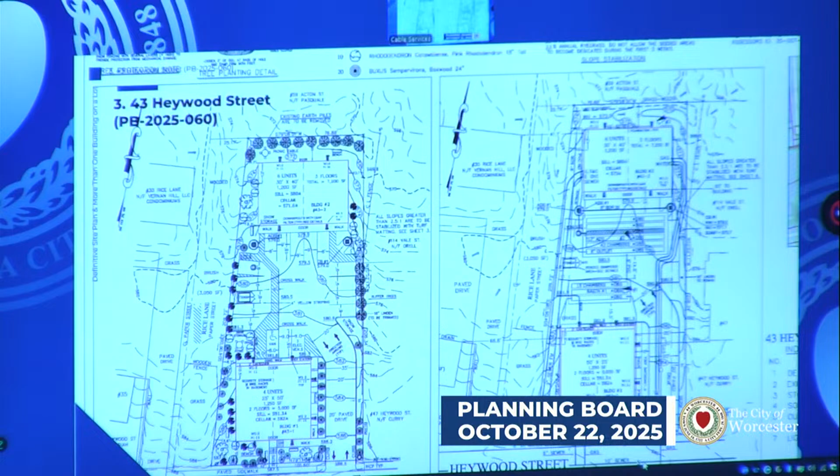We have frontage with adequate utilities on Heywood Street. All of the required utilities will be coming from Heywood Street. There is a paper street to the left, which we do not propose at this time to do any work in. However, at a future date, we anticipate acquiring that street because of the 50% ownership. The other half of the street has been claimed by the abutters on that side.

We're here tonight for a definitive site plan approval, review and approval hopefully, and a second special permit to have 2 buildings on 1 lot. We're proposing 10 units, apartment units, on the site, and it worked out best to develop 4 units in the front and 6 units in the back.

We could have done a single building. It would have been considerably taller. We felt, following the general appearance of the surrounding neighborhood, it would be better to keep the buildings lower and ask for a special permit so that we could do 2 buildings and end up with the same number of units, 10.

As I mentioned, the lot currently is, the majority of it landscaped, trees, brush, things like that. We are proposing to have 1 building in the front, 4 units, building in the back, 6 units, and all of the parking and drainage utility facilities will be in the center. It works out pretty well that way because all of the parking spaces are readily accessible to the 2 buildings from the center. It also has all the parking and other issues that go with it, dumpsters, things like that.

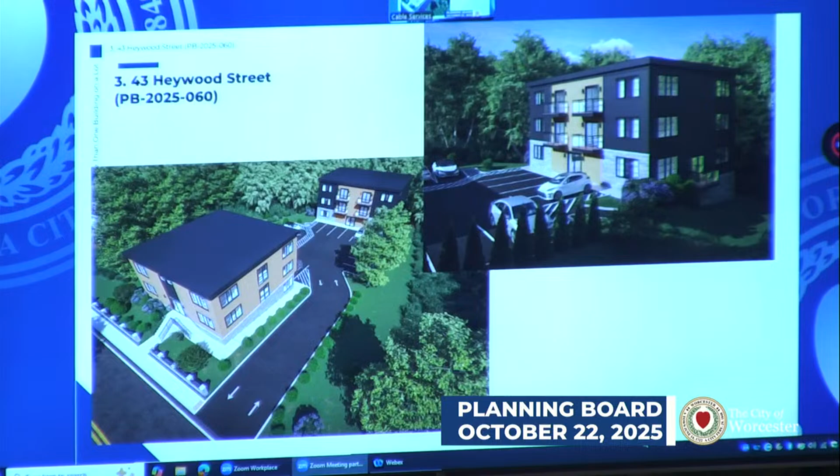They've provided a striped path through the parking facility that leads from the back of Building 1 to Building 2, which is great. We love to see the dedicated pedestrian infrastructure. We just asked the applicant if they'd considered an alternate treatment, like stamped concrete or pavers, to further designate this, since they're not able to separate it from the parking facility.

We had also asked, and it's highlighted in our memo, though it's tough to see here, around the northwest and northeast corners of the parking lot there's 2 catch basins, and some striped areas around the landscaping. We were hoping it may be feasible to regrade that area so the catch basins will still work as designed, but we can add some of that landscaping back in.

And speaking of landscaping, we have some other comments regarding that too. With the layout of the site, 2 buildings, it's not a layout we see particularly frequently, and it renders a lot of the site impervious. They are proposing some on-site infiltration, with 2 subsurface units, and they've provided quite a bit of information regarding how they intend to handle, manage, and operate it in the future. But we're just hoping there would be some opportunity to gain some of that landscaping back, given how much of the site is going to be impervious.

Some additional questions to the applicant: they have some amenity space in the first building, we asked if and how it's going to be programmed, and whether it's going to be available for residents in both buildings. There's an interior bike storage room, I think 12 bicycle spaces, and then like an empty room, which we were curious how it was going to be programmed. We also asked that there be some exterior bike parking for residents in the back if they don't have access to the interior secured bike storage, and for use by guests.

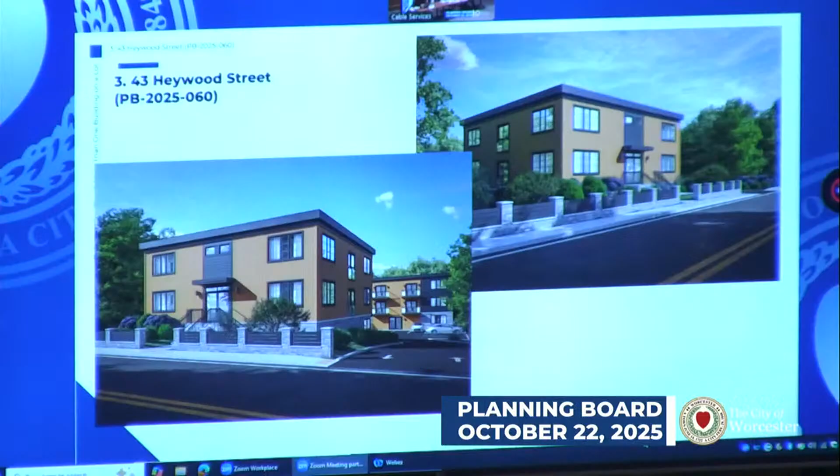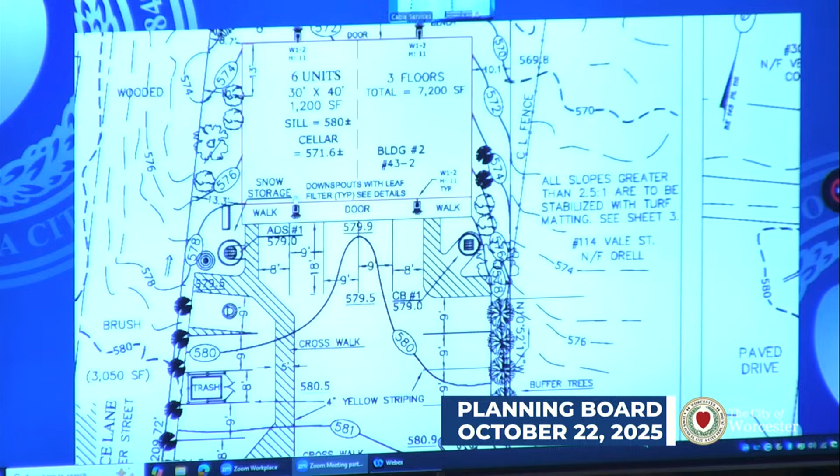The question was the staff suggestion to extend the landscaping area adjacent to the two catch basins on the northwest and east side of the parking lot. We did review that. Initially, we thought that having the area striped pavement would be beneficial to people who might need a little more space to get out of their car. But they could step out on the grass just as easily as pavement. So we are proposing to plant a low-growing dense grass in that area. However, the actual area directly around the catch basin and the drainage channel that goes to it would be paved. So you'd have like a 4-foot paved area just to keep dirt from being eroded into the catch basin, but the rest of it would be landscaped.

If I might also add, when you're talking about drainage and landscaping, we acknowledge that there is a problem with water getting onto the property of the fellow who just spoke, but it's not coming from our property. It's coming from the property above us. It passes through the rear of this property, a low spot, and continues on to his yard. There's no question, we have addressed that with the stormwater management design so that in the designed storms we have, 10, 25, 50 year, 100 year, we've actually reduced the drainage runoff onto his property by volume and by the Q factor, or velocity.

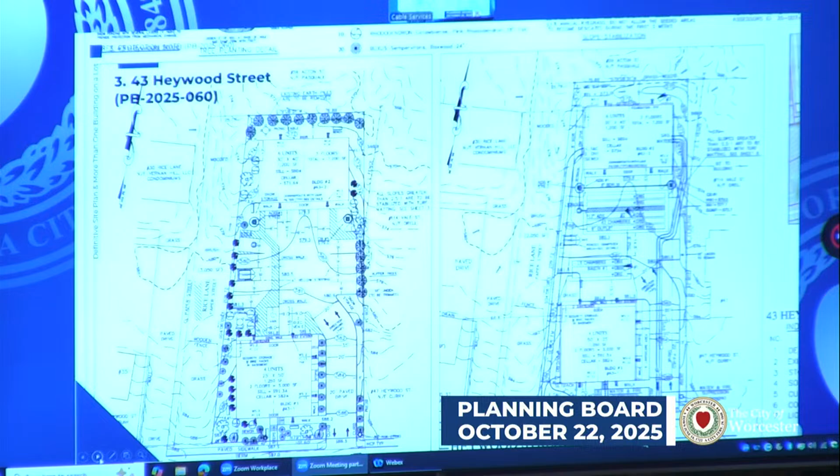Okay, I have a couple questions for myself. So I heard Mr. McCormick, and I think Ms. Russell, we'd be looking for staff to recommend a condition on just narrowing the landscaped areas we were discussing related to the catch basin, understanding that there would still need to be a path for the water. My second question is, there are 4 compact spaces and 2 EV spaces that are proposed. Wondering, for the EV spaces, is the applicant willing to put one charger online at occupancy?

You mentioned the number of compact spaces. How many did you say there were? Because there's quite a few. Staff believes there's 4, and then 12. We met the requirement for that. We think the larger spaces would provide plenty of space as well.

Related to the EV charging spaces, the question was would the applicant be willing to put one charger online at occupancy? This is Wolf Gentile, the applicant. I'm the current owner of 43 Heywood.

As per the email we got today, they requested 10% to be online. We should be able to do that because we're going to have the EV ready anyway. It's just a matter of running the wire. That'd be great, and we recommend it, and appreciate your answer on that.

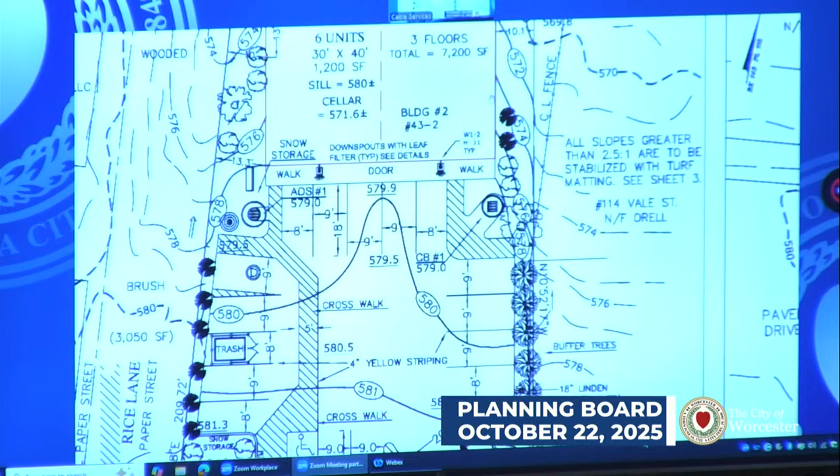Before I make the motion, is the applicant okay with that? Yes, absolutely. Okay, with that I would make a motion to approve—actually, I'd close the public hearing first. Second? Or is it a public hearing? No public hearing. Okay, take it back.

I'd make a motion to approve the definitive site plan and more than one building on a lot for 43 Heywood Street, subject to staff recommended conditions of approval on pages 2 through 5 of the staff memo, including the addition of a condition 1O with subsequent renumbering of the conditions. Condition 1O regards, as stated by staff, the landscape islands.

Second? On the motion: Mr. McCormick, yes. Mr. King, yes. Mr. Delera, yes. I vote yes as well. Motion passes 4-0. Good luck. Thank you, thank you very much.

Okay, next item we're going to hear tonight is item number 4, which will be 9 Ashland Street. This is a public meeting for a definitive site plan.

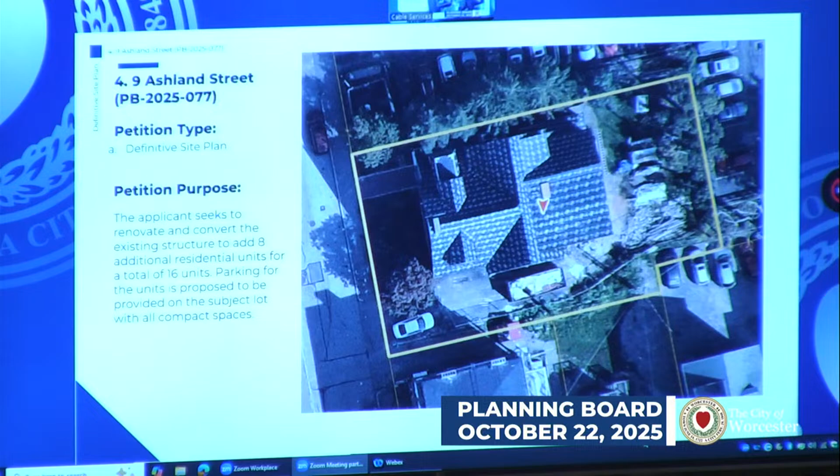My name's Gershom Gulko. I'm a lawyer here in Worcester, I've been a lawyer here for 46 years. To my left is Adam Gaval, the property manager and developer of this property at 9 Ashland Street. He's been before you before, and before other boards as well.

He has an ability, and in fact a history, of taking underutilized, sometimes dilapidated properties and turning them into the Taj Mahal. 9 Ashland Street, when he acquired it, was an abandoned drug house, and he has formulated plans to make it suitable, modern, efficient housing.

We've been before the zoning board and have prevailed, so to speak. I've asked him to bring with him some blow-up boards of a recent project he did on Blackstone Road that shows you the kind of work he does.

Frankly, in my experience, I've represented him and his father and his siblings in this type of business for at least 40 years. He puts his heart and soul into it, puts substantial money into it, and I don't want to waste your time and deliberate further, but he will address everything with regard to site plan approval.

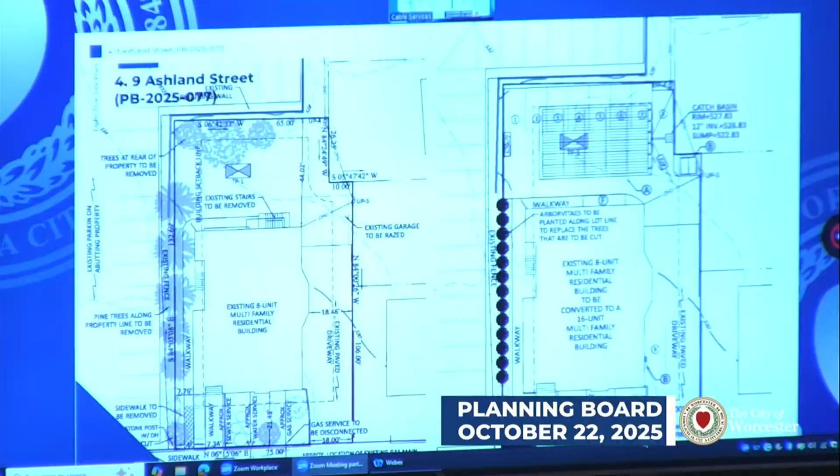I think for myself, I'm also satisfied with staff's review, and I appreciate the applicant's answers to some of the questions. The work looks great. I know a little bit about renovating some of the buildings in Worcester, and it seems like you do a great job, so happy to support.

Thank you for giving me this opportunity to better the city. I'm a Worcester boy, so I'm trying to make Worcester better. Yeah, there you go.

With that, I would make a motion to approve the definitive site plan for 9 Ashland Street, subject to staff recommended conditions of approval on pages 2 and 3 of the staff memo. Second? On the motion, Mr. McCormick? Yes. Mr. King? Yes. Mr. Delera? Yes. I vote yes as well. Motion passes 4-0. Good luck. Thank you.

Okay, next on our agenda, item number 5, 225 Shrewsbury Street. This will be a public meeting for a definitive site plan amendment.

Good evening, Mr. Chair, members of the board. For the record, my name is Joshua Lee Smith. I'm an attorney with Bowditch and Dewey, and I'm here, as you indicated Mr. Chair, because we're seeking a slight modification with respect to this project. This is a project that most of the members, not all, were present for.

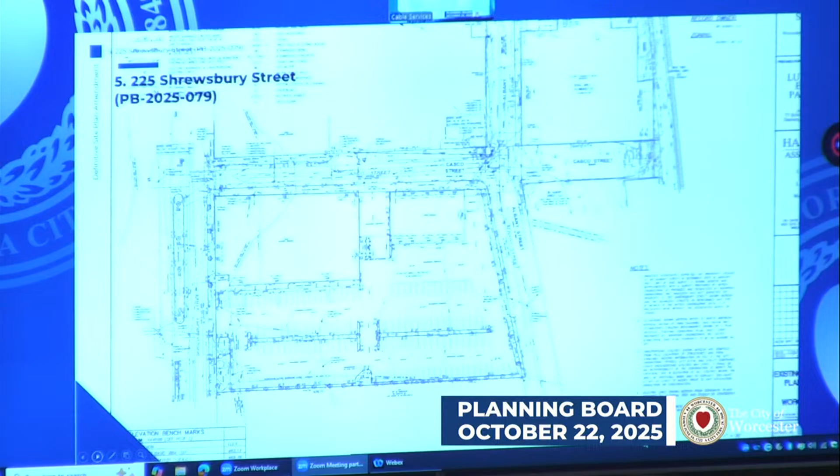So they're looking to relocate them to the end unit here, to the far right, as you can see.

So the one substantive item that we are looking to amend here is the removal of one of the conditions, which, to be honest, at the time we did have some discussions leading up to the meeting, and then ultimately there was a vote, and the condition, we kept saying no, we can't do it, and then the condition ended up staying in there for the vote. So it was a little bit of an oversight on our team, and after the vote occurred, our design team looked into it further, tried to see whether it was feasible or not, and it just didn't work.

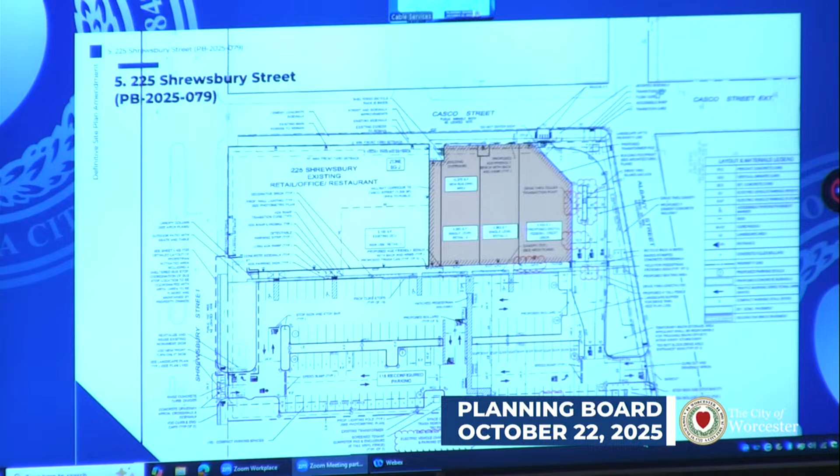No concerns for myself, it seems pretty straightforward. Mr. King? No concerns, thank you. Mr. Delera? Agreed, no concerns. Mr. Toomey? No comments, thank you. I also have no comments. This seems mostly administrative, so I think we're ready for a motion.

Make a motion to approve the definitive site plan amendment for 225 Shrewsbury Street, subject to staff recommended conditions on pages 2 and 3 of the staff memo. Second? On the motion, Mr. McCormick? Yes. Mr. King? Yes. Mr. Delera? Yes. I vote yes as well. Motion passes 4-0. Good luck. Thank you very much.

Moving on to the next item on our agenda, this will be item number 6: 76 1/2, 78, 80, and 82 Providence Street. This will be a public meeting for a definitive site plan and also a public meeting for more than one building on a lot.

Bear with me one moment, Mr. Chair. Sure thing.

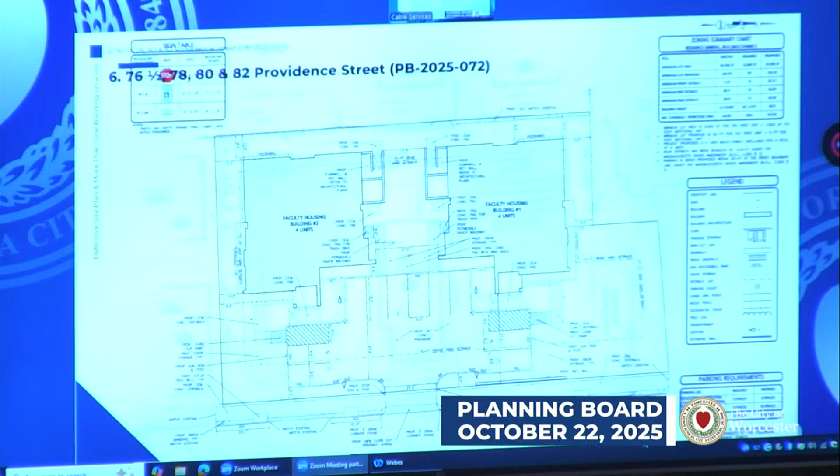And so here I'm going to hand it over to Clay. As I mentioned, we're showing some of these buildings and structures that are on the Academy's historic campus. So there was a lot of thought that went into the design of these buildings and the location and siting of them that went into the ultimate product that you're looking at now.

Thank you. Clay? Yeah, sure. My name is Clay Smook. I'm with the firm Smook Architecture and Urban Design. I've been practicing architecture in the Commonwealth of Massachusetts since 1989.

Worked for several firms and started my own firm a little over 20 years ago. I moved my firm from downtown Boston to Westboro to bring a level of Class A architectural and urban design services to Metro West, and it's been a wonderful journey.

My firm, as I mentioned, does urban design. We really look at projects and what their impact is to the city and the street as much as it is about architecture as sort of a jewel and an icon.

We started this project earlier in the year, late last year, really looking at the existing buildings on the site, as well as the triple deckers lining around the building. I think some of what we gleaned from the site was that the buildings tend to be in a Richardson Romanesque design quality, but also have certain Frank Lloyd Wright qualities. They generally have a central entry, and they tend to have hip roofs.

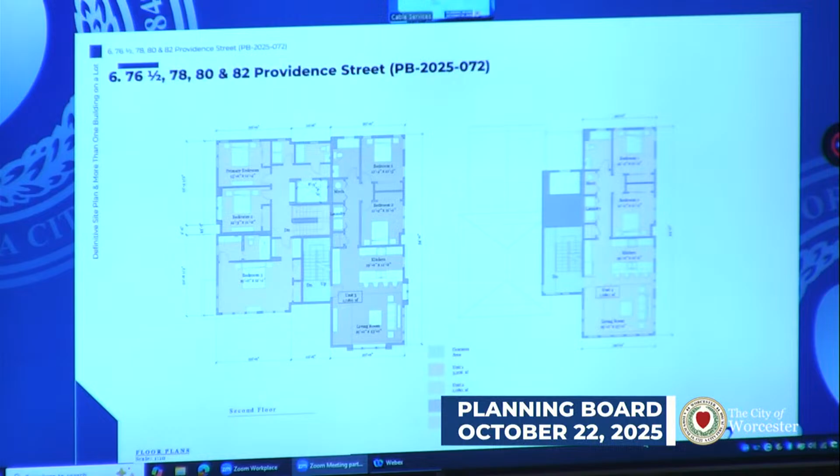On the next slide, we're back in the townhouse on the left, the yellow ochre color. You've taken the elevator or the stair up. All the rooms are accessible, all the baths are accessible, so it's a totally accessible unit. On the right side is the stacked flat, where a generous central stair tower takes you up to the unit above the other flat. These last two stacked units are not required to be accessible, although we're carrying the dimensions from the lower level nonetheless, because being disabled doesn't necessarily mean you're in a wheelchair. So stacked on the right is flat number 2, and all the way on the right, in that pale color, is number 3.

These are the elevation drawings of design development. They're not rendered, but they are labeled to talk about the level of materials we're building here. These are going to be built as legacy projects, not seen as disposable housing stock. We're using real materials, real brick that we'll be choosing to marry into the look of the existing building, lots of architectural detail, cornices. The windows will be a Pella window, not vinyl, an aluminum-clad window with real wood on the inside. Obviously all this meets the current energy code.

The building is also clad in Boral, which is a fly ash product, similar to Hardie product, but a little bit better. It doesn't absorb moisture, and it holds paint incredibly well. When you touch it, you won't be able to tell the difference between that and wood, but it will last over 50 years without needing maintenance.

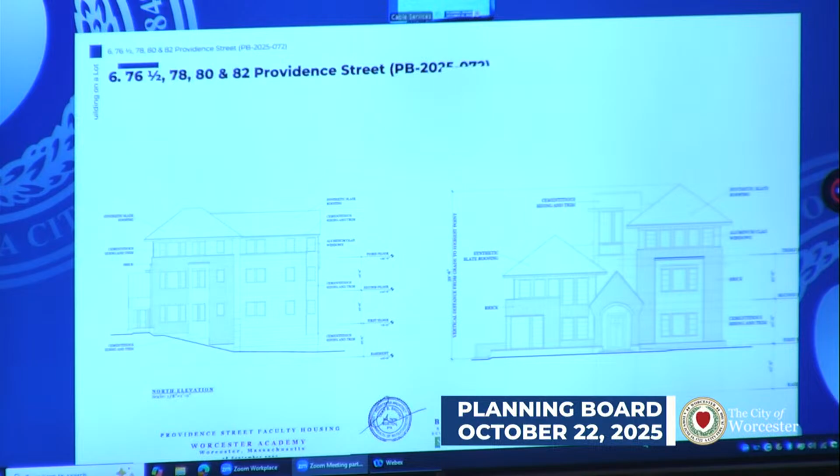What's really interesting on the slide on the right is the grade difference. It's more pronounced in the rear of the building, as you can see—about a 6-foot grade difference.

With that, I'll hand it back to you, and I'm certainly willing to take any questions.

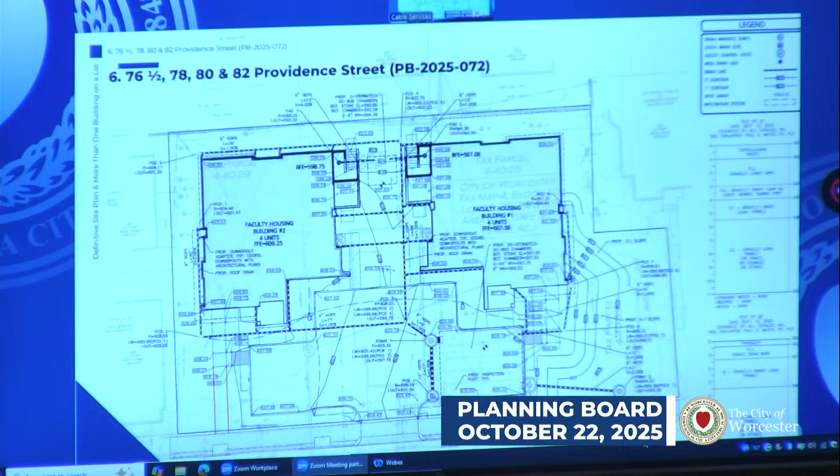One thing I wanted to mention is the aggregate of this site—about 19,000 square feet, with 3 separate parcels. When I began looking at this, we considered every building type that could go on this parcel: 3 individual single-family homes, 3 townhomes, 3 triple-deckers, and also an apartment style with a double-loaded corridor. After vetting all of that, we decided this conjoined 4-unit project—basically a townhome conjoined to a triple-decker—made the most sense for fulfilling the requirements and needs of the faculty of Worcester Academy.

Thank you, Clay. That concludes our formal presentation. There are some recommended conditions of approval in the DPRS memo, and we agree with the vast majority of them. We're down to some discussion on EV chargers and bike storage, but other than that, I think we're very close.

Through the chair, this is Michelle Smith in the city's planning division. As was stated, you have in front of you this evening site plan review, and with more than one building on a lot, the applicant has requested to withdraw. That is in part due to a Dover determination the applicant received from inspectional services related to the educational use this supports.

As part of that, they've not only been determined to not be subject to the more-than-one-building-on-a-lot regulations, so you can withdraw that when you move to a vote, should you do that, but also relative to certain aspects of zoning compliance.

So when I say that, I mean generally dimensional requirements of the ordinance or items that would specifically require discretionary approval. In this case, the parking requirements and the rear setback have both been determined to be reasonable in context, as well as the location of the parking in front of the building, which would typically be prohibited by the zoning ordinance and only allowed through a special permit, has been determined to be permissible in that location absent that special permit. So those are the three design elements being modified here because of the nature of the educational use and the accommodations provided for in the state law. That determination was included in the materials submitted by the applicant and available to the board.

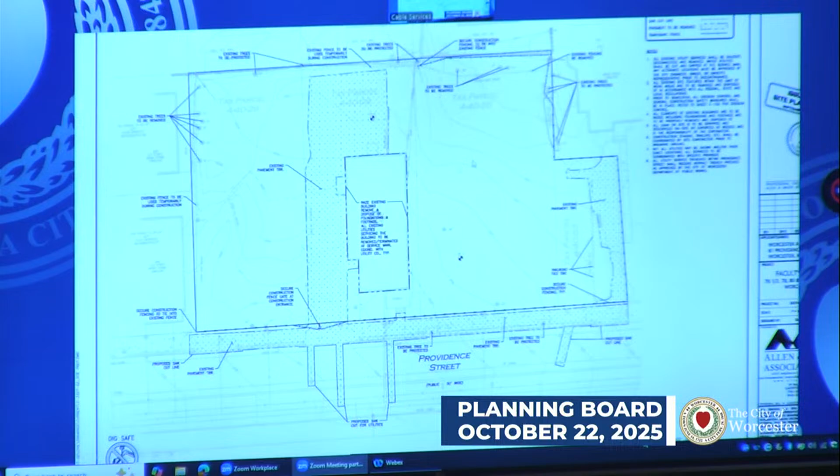This plan here is the demolition plan, so you can see it shows the trees that are proposed to be removed. In that top right corner, where it abuts the property, we've zoomed in a little bit. I know it's hard to see, you can feel free to go up to one of the TVs if you'd like. But the trees in the area you're referring to are shown as to be removed where they're on this property. So I can't see from here. Sure, I'll point to them too.

Just a question, what trees will remain in back there? These trees right here - there's a 36-inch tree, I don't know what species, an 8-inch, and a 15-inch. Those three are proposed to be removed. They would be behind the chain link fence, toward your property, but closer to Providence Street than the retaining wall, if that makes sense.

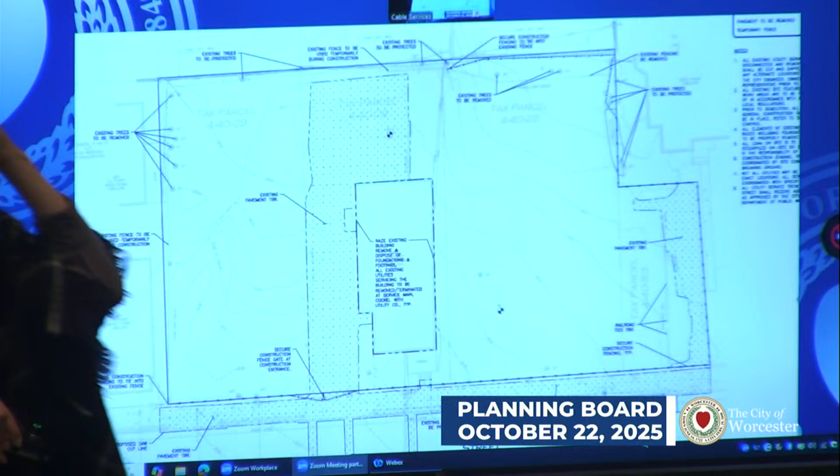And what about at the left corner? Up, no, to the left, right there. Over here? That tree is shown as to be protected, so there's no proposed change for those trees. But it sounds like that's where there are electrical wires going through them. I've seen buckets used in the past, but this is going to be extremely tight, so it's a safety concern.

But thank you. Thank you. Joe, give him your number or give him Howard's number. I'll let you guys exchange contact information.

Is anybody else from the public wishing to speak on this item tonight? Anyone in the room? Seeing none. Anyone online?

All right, let's move on to board discussion.

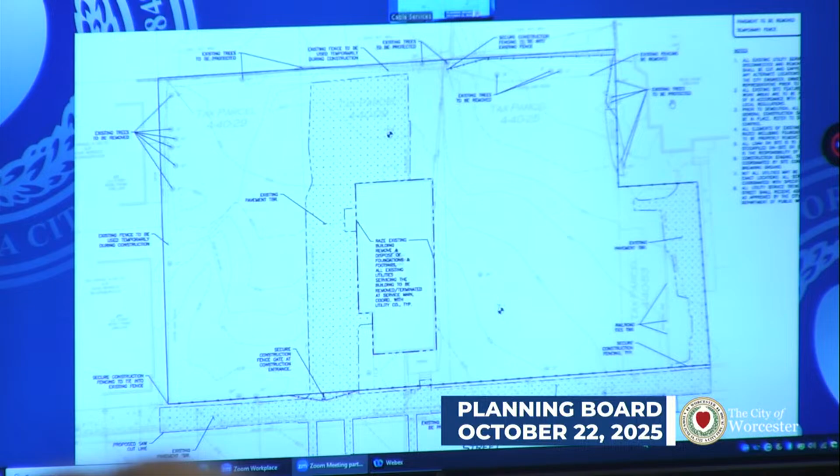I guess maybe to start with the conversation or condition on the sidewalk or sidewalks. I think as staff was commenting, it would be a preference to see both sidewalks not go through the parking lot. I think I saw a sketch on another plan with an idea of trying to figure out a way to get it from the building to the sidewalk, not going through the parking lot. If that's possible, I think that would be my preference.

But I'm sure the other board members can weigh in on that as well. Otherwise, big picture, I appreciate the detail and time taken on the architectural side of this project to match the existing Worcester Academy campus and the neighborhood. Certainly, I would agree with staff's comments that we would prefer to see parking in the rear, but acknowledging this is a Dover Amendment project, and I don't really see that the board is in a position to change that at this point.

Otherwise, the pedestrian connection, which I think was condition 1X, we were considering striking it because the thought is that the pedestrian desire line would be to use the Etna Street crossing. It seems most likely to me that they'll probably use neither and just cross mid-block. I'm assuming the city wouldn't like to see a mid-block crosswalk, so I don't know if there's a great solution to that, but otherwise I would feel comfortable striking that because I would agree if one of the two intersections were to be used, that makes the most sense.

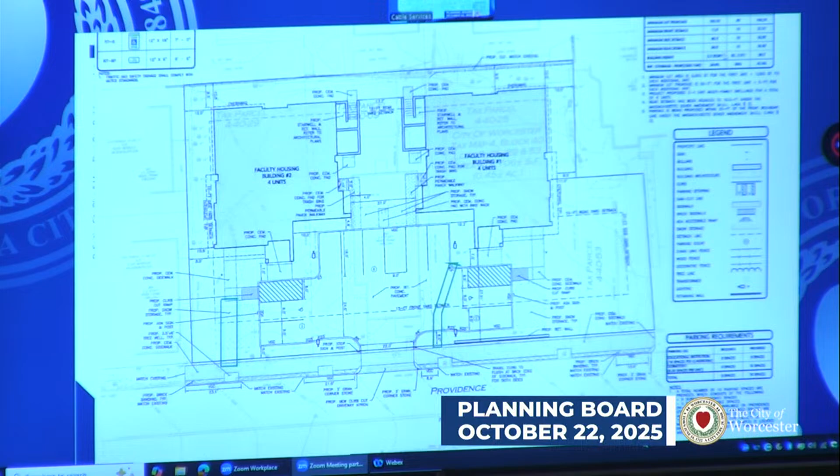Just a quick question through the chair to the applicant. If they did do the pedestrian pathway in front of building 1, would they take out the trees proposed in that landscaping buffer before it gets to the sidewalk? Yeah, so I believe we're talking about building 1 being the right one. Yes, so if that's what's preferred, then there would have to be some adjustment with respect to the plantings proposed in that landscape buffer in order to allow for that walkway to connect to the sidewalk. In that particular location, Rose, can you show the rendering that shows the landscaping in that buffer? So, looks like those are low-lying bushes, probably? Right where the hydrangea is and the high grasses. So that's kind of where the walkway would be coming out.

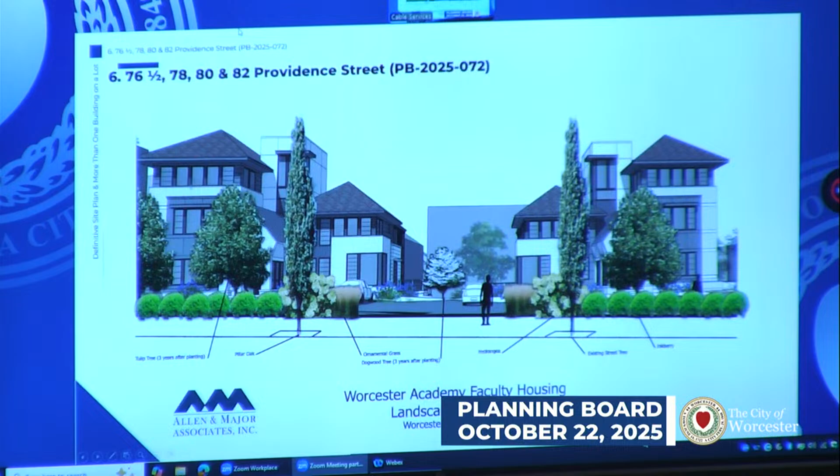Okay, thank you, that was my only question. Happy to support otherwise. Thank you, Mr. King. Mr. Delera?

Thank you, Mr. Chairman. So I agree with Mr. McCormick's take on this, including the sidewalk area. And I would also just like to say regarding the architecture that I really appreciate the thoughtfulness that went into this design. I wish that some of the other projects proposed throughout the city had even a portion of the thoughtfulness that this one has.

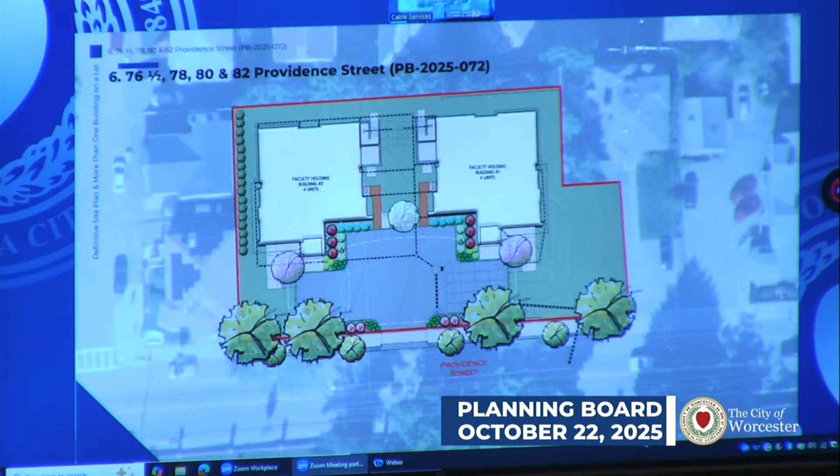I would add that the enhanced architectural character of these buildings is an acceptable compromise in my mind. To that, I think they look nice as rendered. I hope they come to fruition in that level of elegance. Sometimes we see renderings that don't wind up getting built the way they look. I don't think that's going to be the case here, but it has happened in the past. So in general, I am happy to support.

I don't think there are any remaining items we need to discuss, or am I missing something? I think I heard that you're striking X, and based on the discussion, I would adjust 1A to reflect a dedicated pedestrian walkway from Building 1's main entrance to the sidewalk on Providence Street. The walkway shall be ADA MAAB compliant. And for condition S, just strike the S in points to make that singular.

Unless there's no further issues with the applicant, before I make a motion I just want to review. Amendment to 1A that Ms. Smith just noted, removing 1X, amending 1D to read: reflect a total of 4 bicycle parking spaces to be provided on site, full stop, and the rest of that sentence is deleted. We would keep the requirement that the bikes still be APBP and essentials of bike parking compliant.

Okay, so keep that second sentence. Item D, I think we're saying total of, instead of 8, a total of 4. The rest of the sentence goes on to talk about 6 being within the building. I'm just going to read it: reflect that a total of 4 bicycle parking spaces be provided on the site at grade. All bike parking must comply with the essentials of bike parking guidelines released by the Association of Pedestrian and Bicycle Professionals. Agreed. Thank you, Michelle.

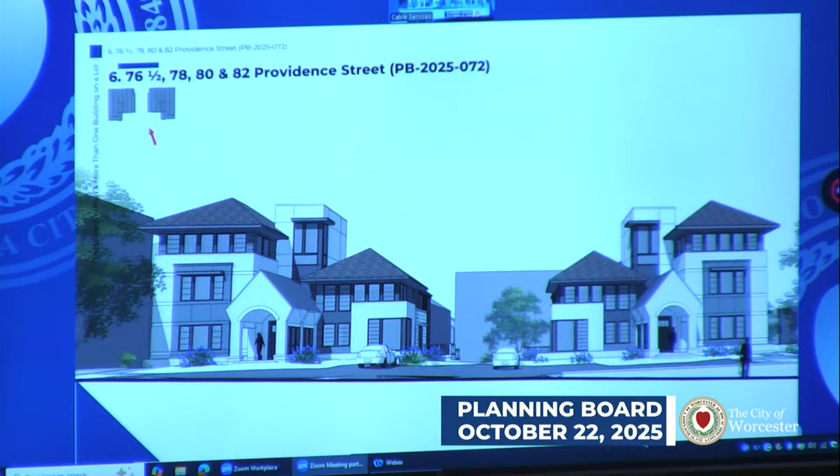Thank you. Thank you very much. Before we end, can we just—head of school would like to say something. Just a quick thank you. It's an important project for us, and we're committed to doing all we can for the neighborhood.

This in particular gives us a chance to retain faculty now that the rents in the neighborhood have increased, and it gives us a chance, as faculty join our community and grow as families, to accommodate them and keep them and have teacher service for a long time. So I really appreciate it. Thank you. Yeah, thank you.

All right, next item on the agenda is going to be item number 7, 232 Stafford Street, a public hearing for a zoning map amendment.

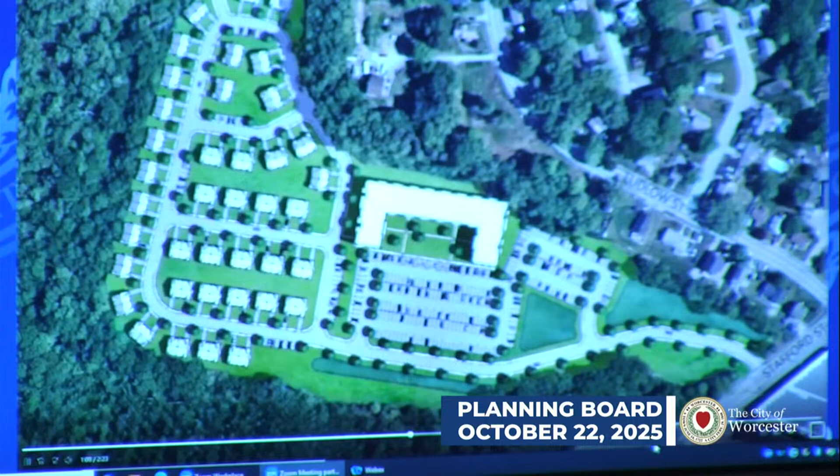The development team is currently contemplating a 5-story multifamily building with approximately 140 residential units, 40 duplex buildings with a total of 80 residential units, and off-street parking for residents and guests.

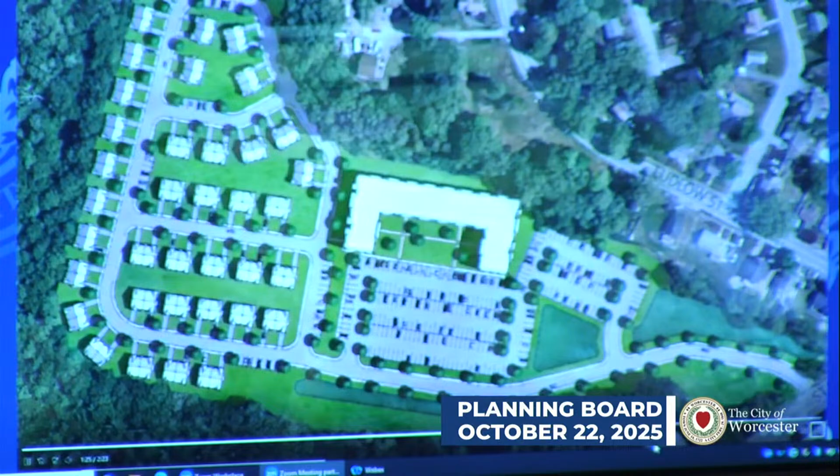These types of residential uses are currently prohibited in the existing RS7 zoning district, but allowed in the proposed RG5 zoning district. The proposed zoning amendment is consistent with the Worcester Now Next plan because the subject property is immediately adjacent to a managed growth area.

The Worcester Now Next plan has identified this as an area within a quarter mile walk of existing and potential future transit corridors that can support moderate increases in housing density from what is currently allowed by zoning.

The development team seeks to enhance the existing transit corridor by coordinating with the WRTA to further extend the bus line up Stafford Street to the extent possible.

Furthermore, the RG5 zoning district provides the ideal zoning district buffer between the RL7 zoning district along Ludlow Street and the manufacturing uses and zoning districts to the south of the property. The RG5 zoning district provides opportunities for denser residential uses without the potential for less desirable business or manufacturing uses.

Mr. Chair, if I may just briefly - before this meeting, we coordinated with the district councilor, Haxhiaj, and facilitated a neighborhood outreach meeting with probably 50-plus residents who came to ask questions and learn about the project. We had a great dialogue and are committed to continuing that dialogue, so just wanted to make you aware of that outreach that occurred within the community.

Thank you, appreciate that.

So additional comments from city staff on this tonight? Sure, through the chair, this is Michelle Smith again in the city's planning division.

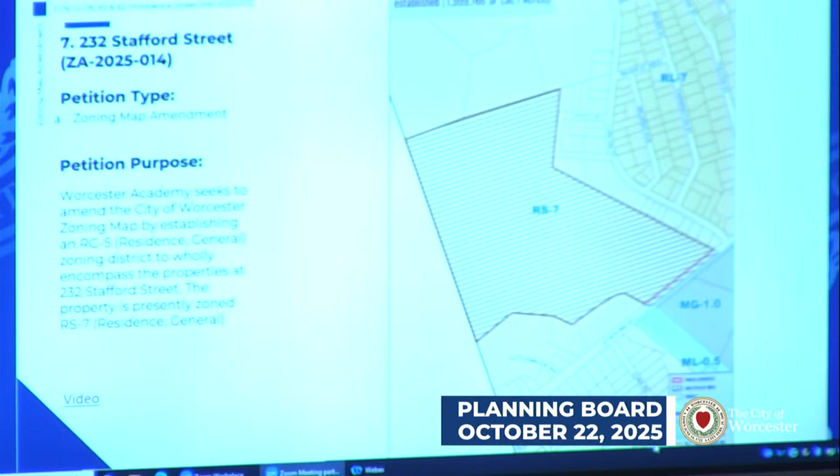In terms of RS7 versus RG5, the board might be familiar, but there are pretty substantial differences within the residential use classification. Beyond that, most of the other uses that would be allowed elsewhere in the city - manufacturing and business uses - are regulated in the same way.

The exceptions are that in the RG5 you could have an urban farm, which is defined by size - so something more like what you'd see at the REC versus a couple raised beds in someone's backyard.

And then there are other uses that become allowed but only by special permit, including undertaker, office, service shop, and personal services, like a barber shop and other forms of low-intensity business uses. Those would be regulated through a special permit. The same with respect to lodging houses — that would be allowed, but only by special permit.

Otherwise, RS7 is our second least dense zoning district, so we really only allow single-family dwellings. The RG5 is our highest density residential district, where we allow high-rise multifamily by right. So there are a variety of differences, but ultimately it's still only residential uses that are really being allowed were the zoning to change here.

There are differences in dimensional controls. Generally speaking, the RG5 is more permissive and the RS7 is more conservative. Because the RS7 really only contemplates single-family dwellings, there's really only one set of standards and everything else is other. So lot area and frontage for any other uses would be the same as a single-family dwelling, while the setbacks would increase and be greater.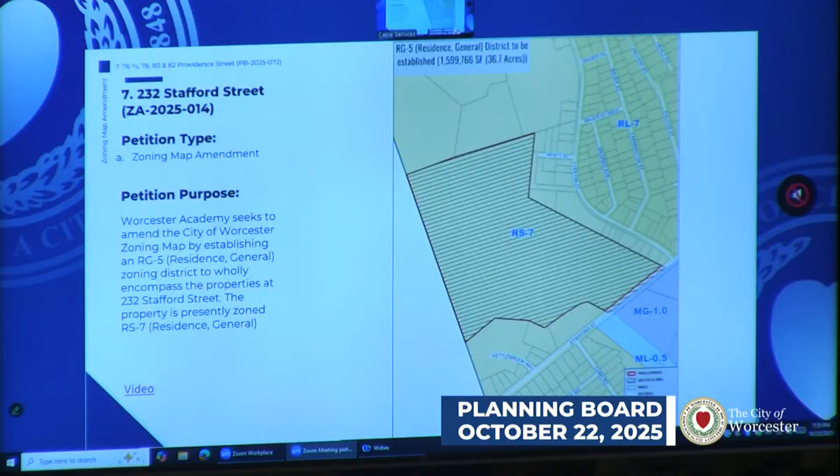Thank you, Mr. McCormick. Mr. King? Happy to support this. Thank you. Mr. Delera? Yes, I agree. I'm in support of this, and I'm glad to see a reasonably dense area added in this part of the city. Mr. Toomey? No comments, thank you. Okay, I'm generally in support of adding some density to our residential areas, so I'm happy to support this petition.

This is a public hearing, so I would make a motion to close the public hearing. Second. On the motion: Mr. McCormick? Yes. Mr. King? Yes. Mr. Delera? Yes. I vote yes, 4-0, hearing's closed.

I'm making a motion to recommend to City Council. I'm going to make a motion to favorably recommend the zoning map amendment for 232 Stafford Street to City Council. Second. On the motion: Mr. McCormick? Yes. Mr. King? Yes. Mr. Delera? Yes. I vote yes, that motion passes 4-0.

Thank you all. Thanks. All right, next on the agenda, we're moving into other business. We have a zoning ordinance amendment discussion, which maybe I can tee up Ms. Smith for.

Essentially, in the Worcester Now Next plan, there were a number of zoning items recommended to be taken up before a comprehensive zoning overhaul. The first was ADUs; this is kind of the second. We're not discussing an amendment at this time. We've been referred this item from City Council, who was given the item to potentially make comments on. They referred it without further discussion. It's going to go to us, then to Economic Development, and once that opportunity for input has been taken, staff will actually draft some recommendations.

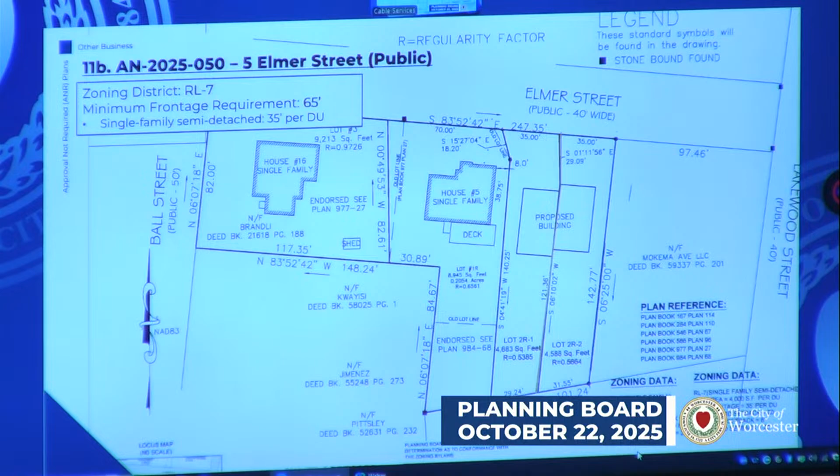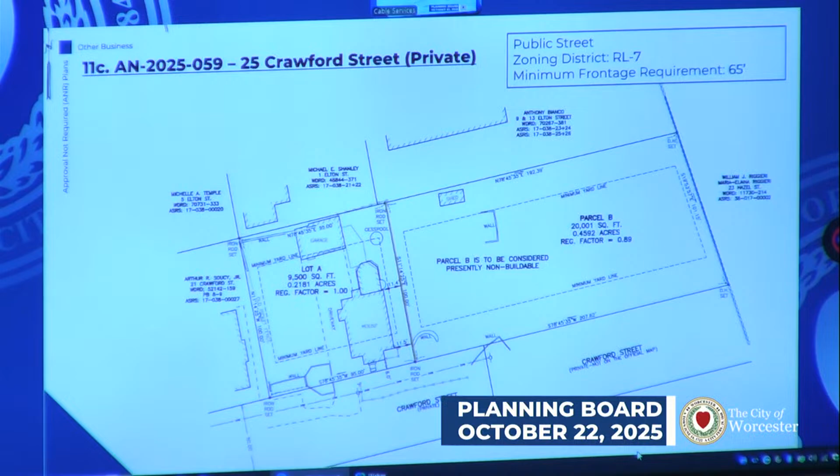Next up, we have 25 Crawford Street. This one is a bit of a more unique situation. It's one parcel today. They're seeking to split it up into Lot A on the left and Parcel B on the right. Crawford Street is a private street, and it extends 285 feet east of Commonwealth Avenue, which is not on this plan, but you can see the road ends right in the middle of the 2 lots. It's not on the official map anywhere to the right, so this Parcel B does not have sufficient frontage in this zoning district, which is RL7. 65 feet of frontage is required. They have about 44 feet, I believe, of frontage on the official map, and Crawford Street, even the frontage that they have on the official map, is not improved to a sufficient extent, so they've noted this lot as non-buildable. It's eligible to endorse this way, but should they want to build on it in the future, they'll be back to remove that designation. The lot on the left does have sufficient frontage along the private way.

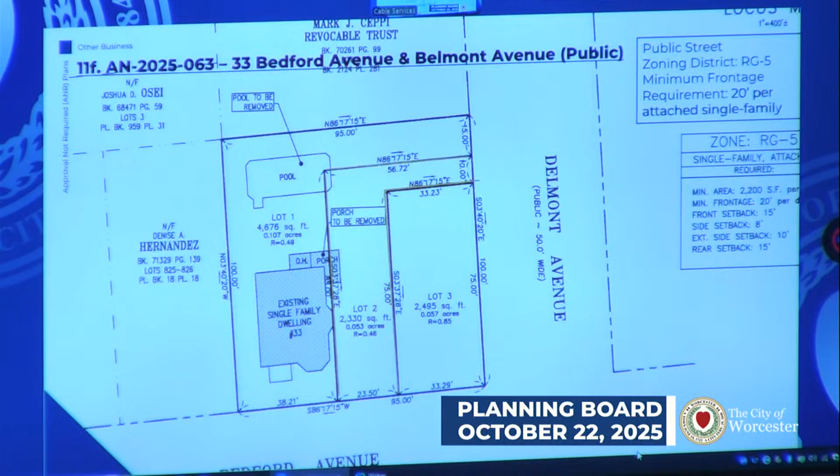Thank you. With that, I'd make a motion to approve A&Rs 11B, C, D, and F. Second? On the motion, Mr. McCormick? Yes. Mr. King? Yes. Mr. Delera? Yes. I vote yes. Motion passes 4-0.